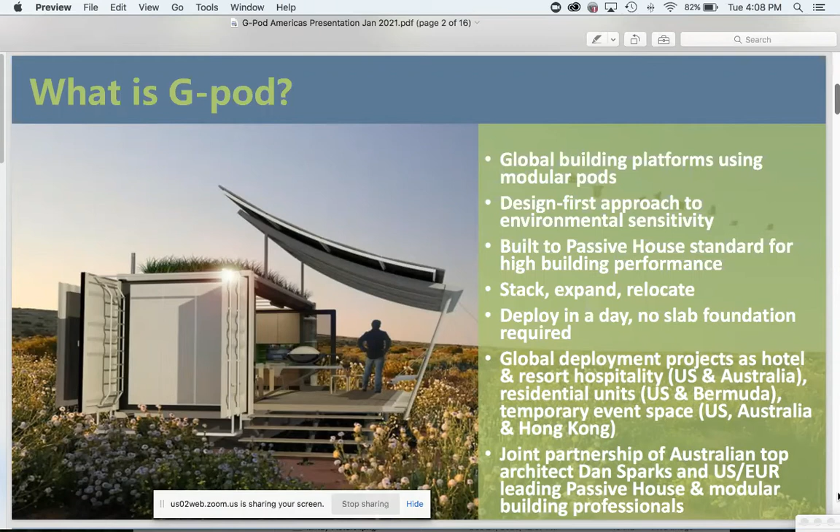Dwell was started a while ago. It's an older product for us, but we have quite a few that we're trying to bring out. We've got the first single from the record released, and we're getting the rest of the songs recorded and put together for the album. So that's what we're up to now, and we're kind of focused on Nexus, but that's a big one. We'll talk more about that as we go.

The future is kind of hard to make predictions about. We all try to do it a little bit. It's kind of tricky, we don't have much data from the future. So we think relocatability is important, designing for different uses, trying to give future generations flexibility.

I think the title of the talk, Will Our Kids Want the Buildings We Leave Them, is kind of cheeky. I don't have any kids, but at the same time it's a good topic, right? Everybody's got families, and what are those future generations going to need in the way of a building?

I think we know from the passive house folks that water is something we need to control pretty carefully if we want our buildings to last a long time, and we really should want our buildings to last a long time. So how do we go about doing that and still give ourselves an opportunity to participate with the future generations?

So I think we can look at the buildings we have and say, great, we've got a building. If we're going to build something new or renovate or rehab something old, how are we going to do that? We want to be able to create value for those future generations. If we can make buildings last the period of time they were designed to last, I think it's a win for everybody. The future communities will find that valuable.

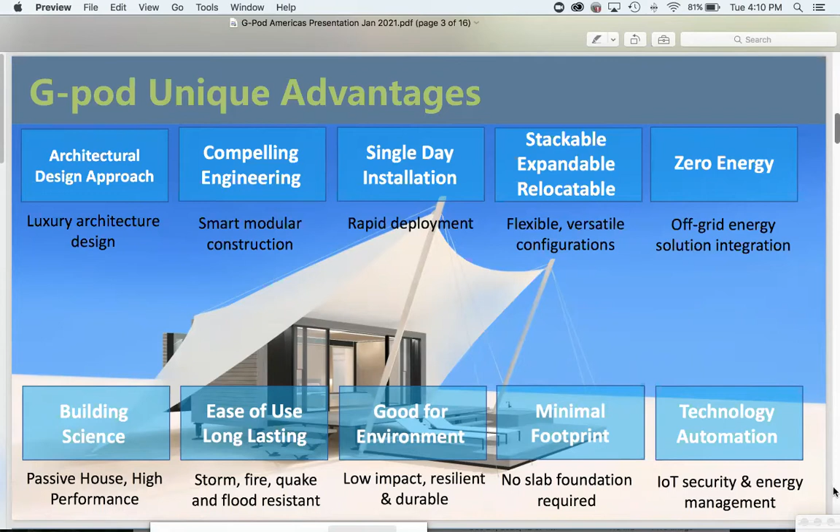The technology helps take the digital design from the folks that are siloed over in the design department to manufacturing, and then deliver those to the operational teams so that we have a legacy of the data that we develop from design to manufacturing and then to operations. So we think the IoT side of that is a big opportunity for us to participate, to make sure the communities of the future are getting the value that was intended when those buildings were designed.

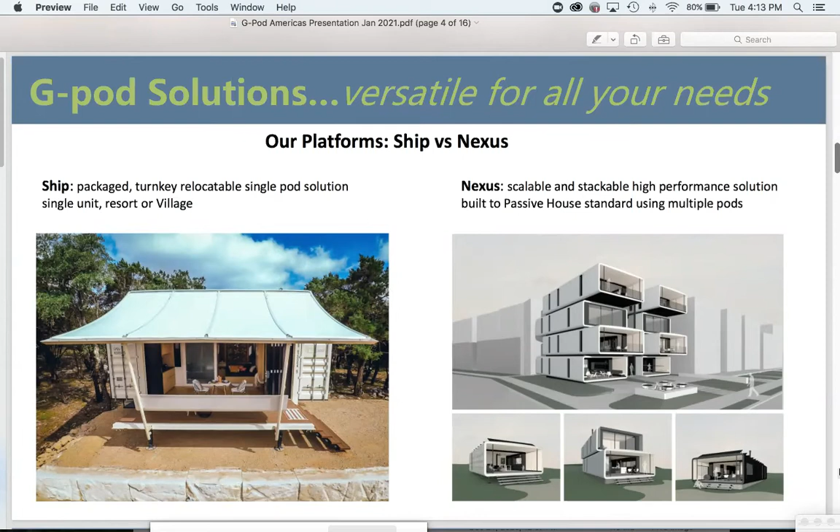Here's a good look at a few different styles that we have. Obviously the Nexus on the right, that is anything from a single ADU unit to big buildings - that's an 8,000 square foot, 8-unit apartment building with a glass stairway and elevator space between the buildings.

That's meant to serve what we may remember was called the hospitality industry, which is sort of taking a break right now, but we hope that all comes back soon. We were pretty oriented towards hospitality before, but now we can focus on something near and dear to me, which is affordable housing. So multifamily, let's go.

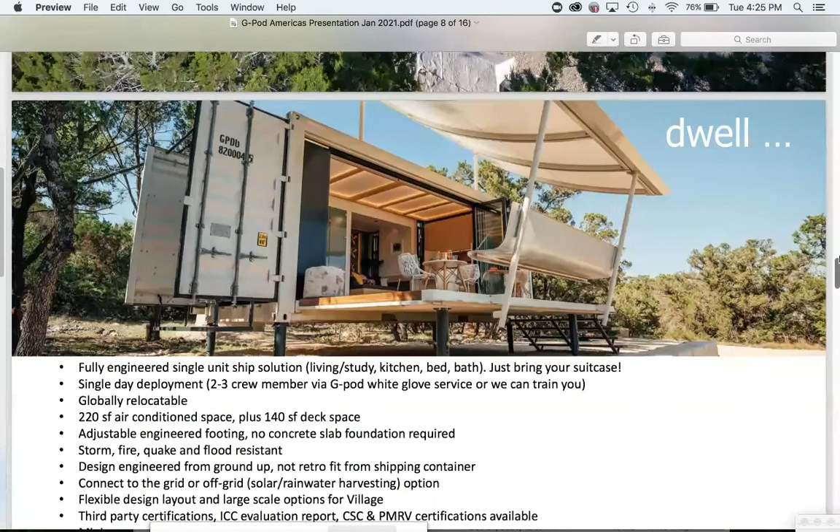So on that particular unit, on your particular dwell—go to the next slide. Same one. Yeah, so on that one we have a little bit more detail, because I was going to ask you: can you tell us a little bit about the space?

Yeah, so that space, it's what I'm sitting in. That is built on a 20-foot high cube, meaning it's a 9.5 foot tall container dimension, but it was never a cargo container—we fabricate those from scratch. It would have the same corner castings and doors, but that's about it. There is some skirting that's structural on a container that we use decoratively, if you can call it that, to be industrial. Maybe it's not that decorative, but we think it's cool.

So we use the skirting on the bottom of the deck there—you can see that was facing out before we deployed the deck. That has skirting, and then the back, the bedroom and bathroom you can see past the ceiling lights—there's a frame and a vertical wall between the bedroom and bathroom. That's a slide out, and it's fully cantilevered. We have beams in the floor, and we can roll that slide out by hand into position, which gives you almost 6 feet of depth.

So it lets you put in big beds and helps make the space very small for shipping and as large as possible for a deployed solution. It gives it a pretty big feel. I'd say most people who see these buildings are quite pleased, because yes, it's a small space—a couple hundred square feet of conditioned space—but you have this 140 square foot deck, this amazing perforated bench, and this beautiful fly roof that lets the light in without burning you with heat. And the front of the building is glass, so there's quite a lot of pleasure engineered into a pretty small space there.

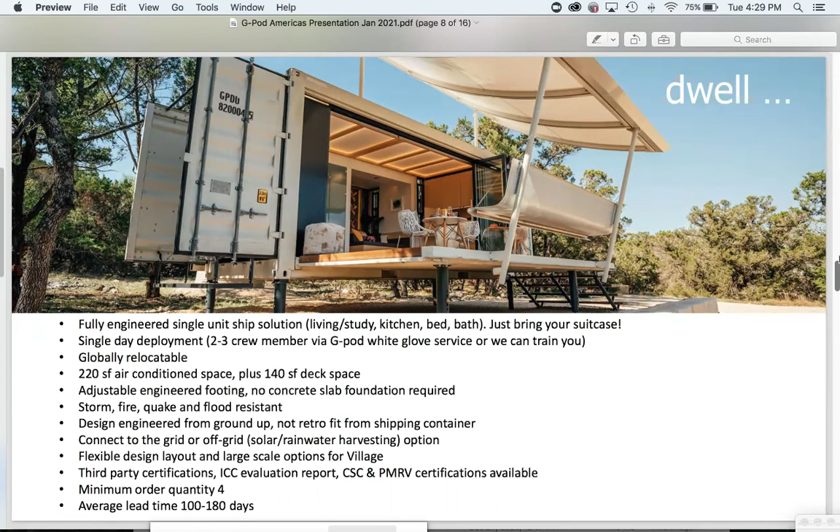So it lets people differentiate their work, and it would always be in a neighborhood the reference point for any instructions or any kind of stories, because people would remember it and be able to see it and tie some sort of experience to it.

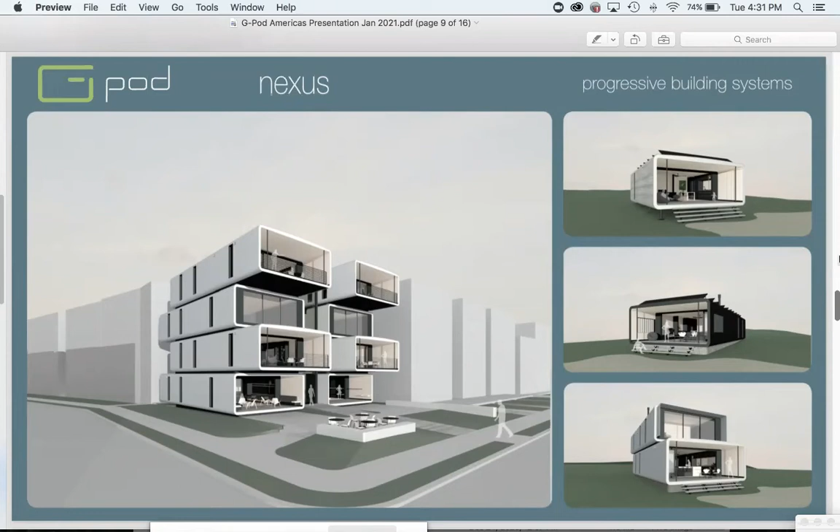Okay, so on the left there is a rendering we just put out this week. That's the building we're doing here in Texas, a 1,000 square foot Nexus villa. You can see it's got the deck module, that's a shed roof version of it. It gives us a little bit better shape for just making it kind of cool looking, and maybe helps the solar a little bit.

The solar is not standing up there. Normally we'd have that angled at the sun a little more, but it looks cool that way. A couple of interior pictures there, and then the 2-story Nexus as well. So those are all parts of the same brand, or the same product in our brand.

It's meant to be something scalable. So if you wanted to develop a building and you were thinking about what kind of size you wanted, those are quite spacious. On the left there, you can see the top of the shed roof, that's a 13-foot tall section there, so it's quite high.

The woman standing there shows there's quite a bit of space around her, and on the other side it's 10 feet high. So it's a good proportion, but it lets people pick the size that they want without having to pick a predetermined shape. We think the manufacturing for this type of product is a lot easier than something with 4 or 5 different roof lines and a lot of carpentry.

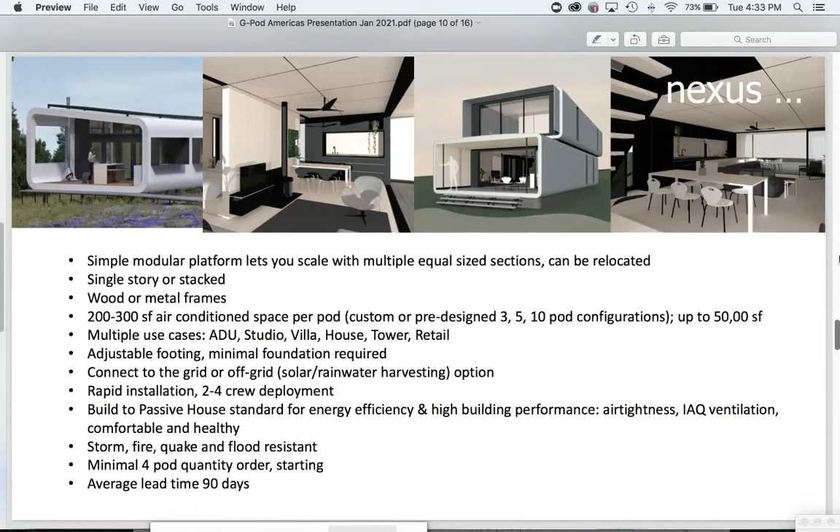We're commercially oriented. We're happy to sell to consumers, but the business we're most keen on is the volume, the commercial stuff. We want to work with developers looking for a solution that fits into their market but gives them a chance to be recognized for doing something unusual, with fewer people—just like Offsite normally presents an opportunity to do a lot more work with less labor. If you have a team of 30 people, maybe you can do 20% more projects because you're using Offsite in a way that lets people do more quicker.

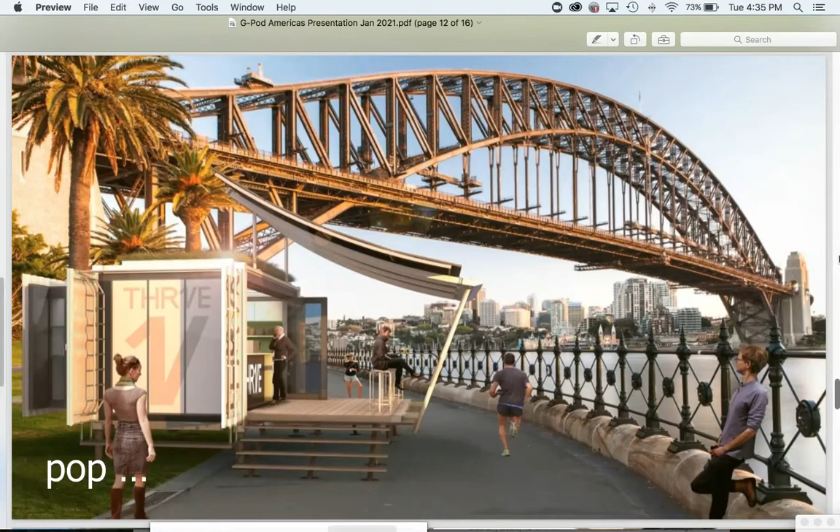So that's always part of our approach. We're trying to pair the commercial side of buildings with the personal needs that we would have—we all kind of need buildings for different things. We're trying to cover all those avenues and be a useful partner to folks with commercial businesses or who want to build for families and single family use as well: consumers, ADUs, everything in there.

The technology we're working on isn't really part of our talk today. We're getting ready to launch that, but it's one of the threads in our tapestry. We like interesting modern designs, and part of that is supporting the business we're helping build for our customers with good technology, which really hasn't been done yet. So that's a big opportunity for us to bring what we think is a truly commercial IoT solution. We'll be working on that and release details as we get stuff installed into this Nexus prototype we're working on. We're excited about that.

Everything from point of sale to building operations to healthcare—and for larger buildings, the operational side is really key. Say you had a rental property and you were an absentee, remote manager of that property, you could do quite a bit of it, making sure everything's cared for without maybe being there all the time. So it lets the operations side not require a manager on site all the time, things like that.

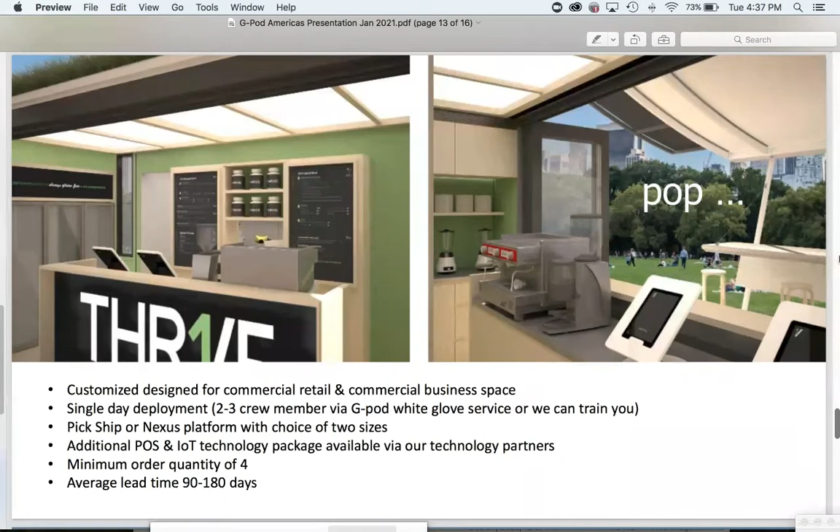Anybody have any questions about anything? Is there other stuff we can talk about? Happy to jump into what anybody thinks the future might hold for materials or anything like that, if we got any questions.